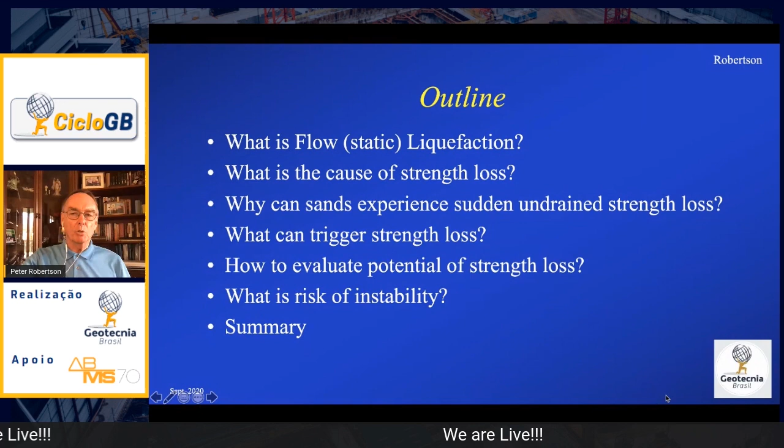So let's start off in terms of what is flow, or as I said, sometimes referred to as static liquefaction. I tend to prefer the term flow liquefaction because sometimes earthquakes can trigger flow liquefaction, and therefore it can be sometimes confusing to think of it only as a static trigger. So hence I'll use the term flow liquefaction. But essentially it's this sudden and significant strength loss resulting in a flow failure.

And there have been several major examples. I'm only going to talk about a few. One of the earliest was actually the Quick Clay landslide in Norway back in the late 1970s. And it's recognized as the Risa landslide. And there are videos on YouTube that you can see what this landslide looked like. Fortunately, it was captured on a home video by several people. And that was in a quick, highly sensitive clay.

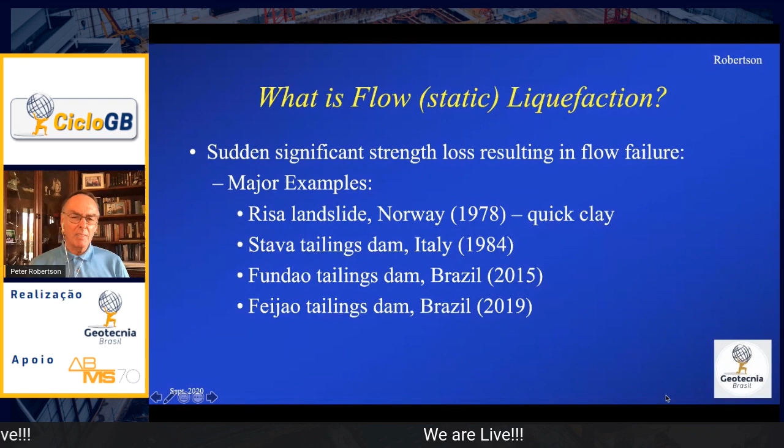But more recently, they've tended to occur in tailings dams, and one of the early major ones was the Stava tailings dam in northern Italy in 1984, and then more recently was the Fundão tailings dam in 2015, and then just last year with the Feijão tailings dam near Brumadinho. And I'll refer to the Feijão tailings dam. I won't mention the investigation. I've given the link to the report, and the details are there.

I just wanted to show some images of the failure just to illustrate how rapid these failures occur. And rather than show the video, I've selected to show some still images from the video. And the time is in the top right-hand corner. So within a few seconds, the failure starts and it bulges, drops at the top, and then rapidly begins to fail and move out very quickly.

And within 10 seconds, the failure has occurred across most of the dam. The initial failure is relatively shallow. And then after the initial failure, when that failed mass moves out very rapidly, there were subsequent relatively shallow failures that retrogressed into the tailings. And within a period of about 5 minutes, most of the tailings were removed from the tailings storage facility.

So if you look at case histories in general, there's been a number of them, and I show an image there of the Stava tailings dam failure in '85, and then the Fundão one below. And the common features are generally the deposits are very young. In terms of geologic age, they're very young. They're all Holocene or younger. And of course, the tailings dams, those are exceptionally young. They're in the order of just a few decades of age, 10 or 20 or maybe 30 years old, which in geologic age, of course, is extremely young.

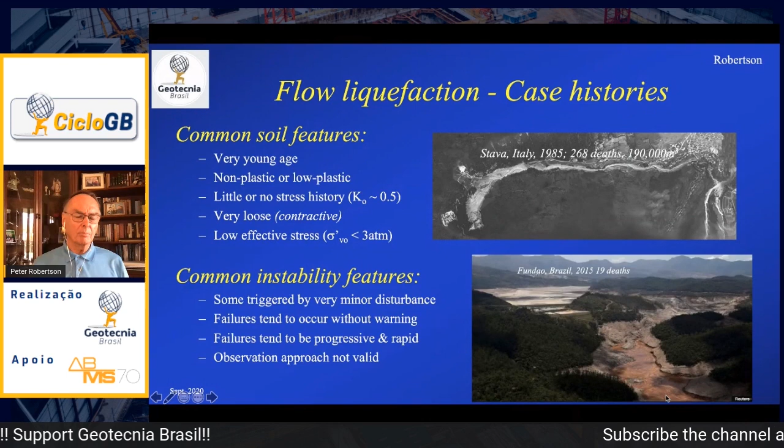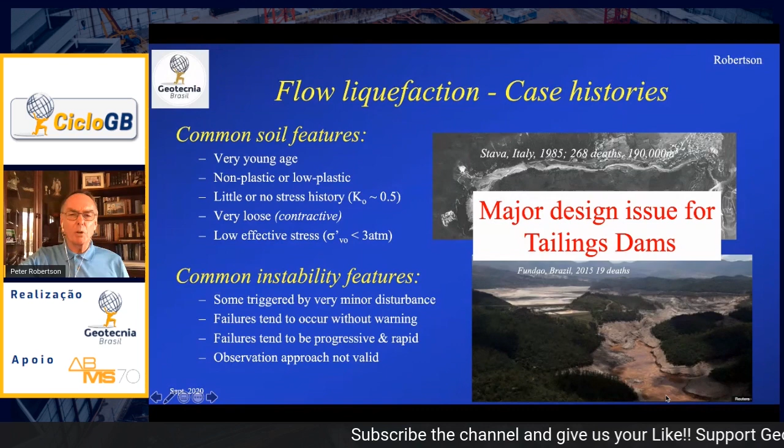Common features of the instability is that some of them are triggered by very minor disturbances. The failures tend to occur without warning, as the still images from that video we showed illustrate. And the failures tend to be progressive and extremely rapid, again, as the Feijão tailings dam failure illustrated. And in tailings dams, often the observation method is used, and the observation method becomes less valid when you're looking at flow liquefaction, because the failures occur so rapidly that there's no time to respond. And so it becomes really a major design issue for tailings dams. And so much of what I'm going to say is really focused on those sorts of structures.

So when we look at the strength loss in undrained shear, most of us are aware that when you shear soils, they tend to move towards a critical state. And the locus of those critical states makes up a critical state line. Here it's illustrated in terms of void ratio against log mean effective stress, and it's illustrated as a simple straight line. And so soils can be either on the loose contractive side, or they can be on the dense dilative side. So if a material is on the loose contractive side, that means if you shear it drained, it will tend to contract down to critical state.

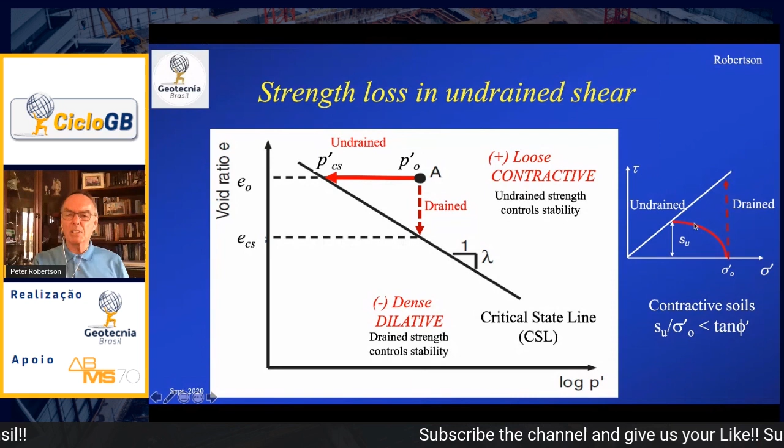But if it's sheared undrained, then that contraction induces a buildup of pore pressure. That buildup in pore pressure decreases the effective stress, and the stress path will move towards critical state at constant void ratio, but decreasing effective stress. And if you look at the strength envelope, soils are essentially frictional in nature, and so the drained strength goes directly up to the strength envelope. But if the stress path moves to the left, with increasing pore pressure and decreasing effective stress, then eventually the undrained strength is significantly smaller than the drained strength.

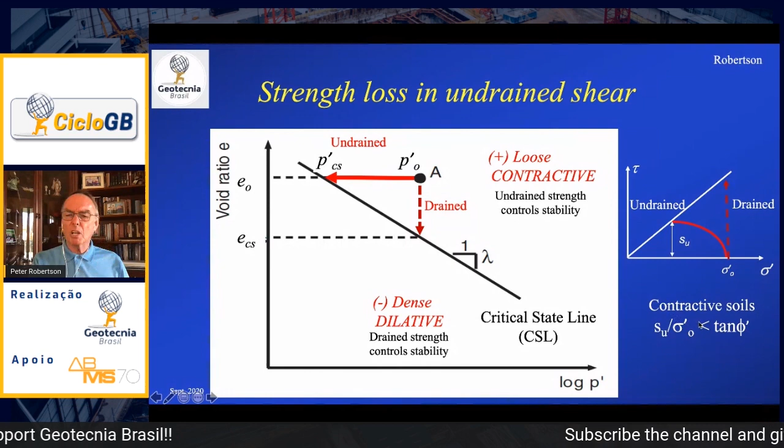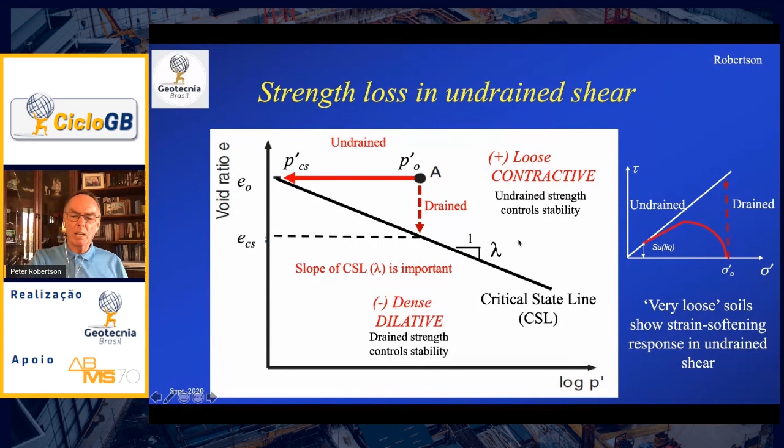And so for contractive soils, the undrained strength ratio is less than the tangent of the friction angle. But also, it depends on the slope of the critical state line. The steeper the critical state line for a given state of contractiveness, you'll get a bigger buildup of pore pressure and a larger decrease in strength. So the undrained strength can actually drop to an extremely low level. And that's often referred to as the liquefied undrained strength or the residual undrained strength. For sandy soils, we tend to use the term liquefied undrained strength, and for clay soils, we tend to use residual. But it's the undrained strength that's mobilized at very large strains. And for some soils, that can be an extremely small number when the critical state line is very steep.

And Been and Jefferies really promoted the idea that we could understand this by defining a state parameter, and it's the distance away from the critical state in terms of void ratio. But actually, a slightly better term would be the stress ratio, which is the ratio of the current mean effective stress to the mean effective stress at critical state. And that's a sort of a direct measure of how much strength loss would occur.

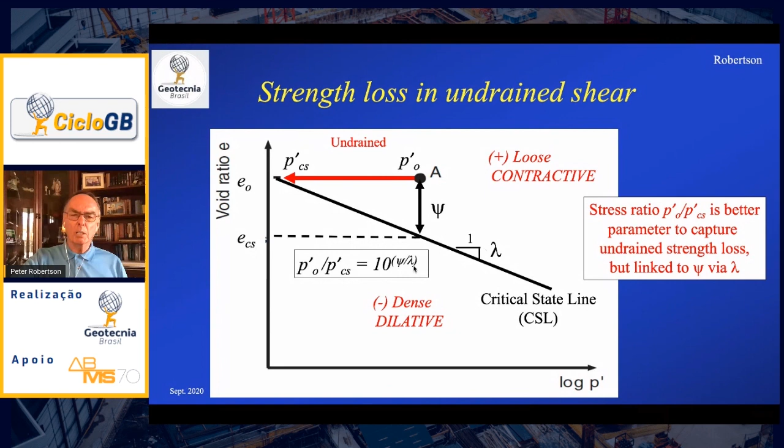And they're linked, so the stress ratio is linked to the state parameter via the slope of the critical state line. And Been and Jefferies described that in detail in their book. Now, if I illustrate the critical state line over a wider stress range, we observe that it is not a simple straight line. It actually curves at higher stresses.

And here I've illustrated two. Toyoura sand is a sub-rounded silica sand, and you can see the curvature occurs at very high stresses. I've chosen to represent the plot in terms of normalized mean effective stress, normalized by atmospheric pressure, so 1 is 100 kPa and 10 would be 1000 kPa. And on the vertical axis, instead of void ratio, I've normalized it as relative density.

That normalizes all the data from various sands. It's not the ideal way to do it, because relative density has uncertainty in terms of how you determine e_min and e_max. But I wanted to illustrate this because Bolton's empirical approach of stress dilatancy was used to estimate the peak friction angle as a function of dilatancy. If you set dilatancy to 0, then you can draw the critical state line using Bolton's empirical relationship. That's what these two dashed lines are, for different levels of the mineralogy parameter Q that Bolton suggested. He suggested a value of 10 for most silica sands and 7 and smaller for more compressible sands.

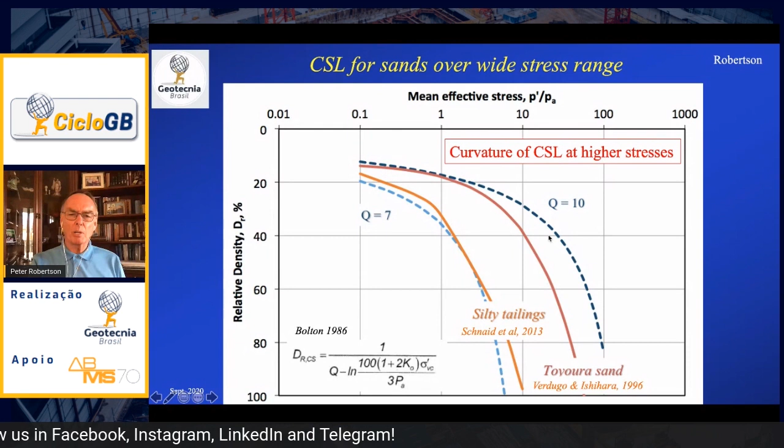You can see here that Bolton's relationship matches very well with the laboratory data, which you would expect because Bolton, of course, based his empirical relationship on extensive laboratory data. So it's not surprising that the two agree. But I show it here as a way of illustrating how much curvature can occur in the critical state line.

Now if I go to an example, in Been and Jefferies' excellent book on liquefaction using a critical state approach, they show data from many different sands, but they show extensive data for Erksak sand, and that's what I've shown here. You can see the critical state line curving. It's quite similar to the one for Toyoura sand. But they tested a large number of samples over a wide range of void ratios and stress levels.

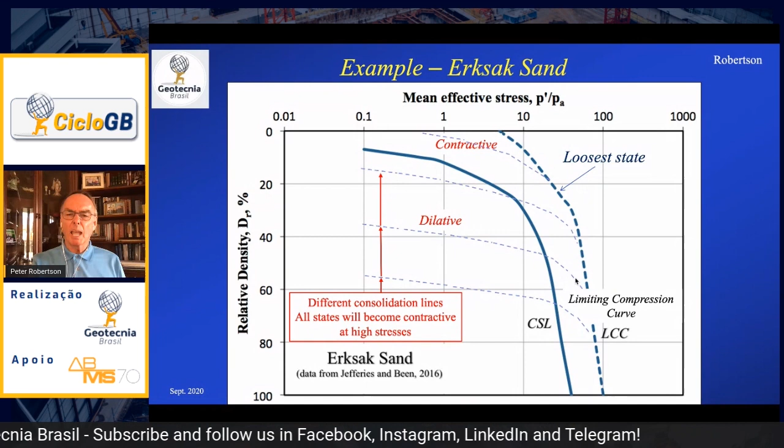And so they were able to also determine the limiting compression curve, which is the loosest state that they could make the sand. I've illustrated in dashed lines a range of consolidation lines: initially extremely loose, consolidating over to its loosest state, and then coming down the limiting compression curve. And then a medium dense sand that would be initially dilative, but eventually crossing over, becoming contractive as the dilatancy is subdued, and then coming down the limiting compression curve. So all sands will eventually become contractive at high enough stresses.

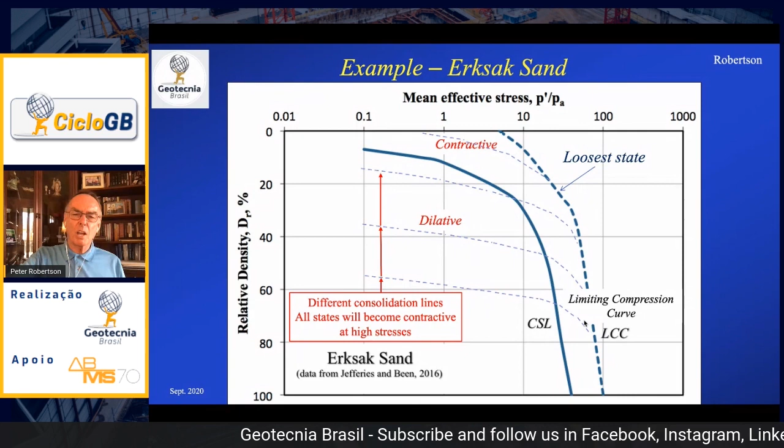But if we look at three samples, I presented a short paper at a conference in Vancouver in 2017 that outlined this in a little more detail. Here I'm illustrating three samples, A, B, and C. They're all at their loosest consolidation state, but at different confining pressures. Sample A is at a relatively low confining pressure at a very loose state, and if it's loaded undrained, there is a significant loss of strength as it moves towards its critical state.

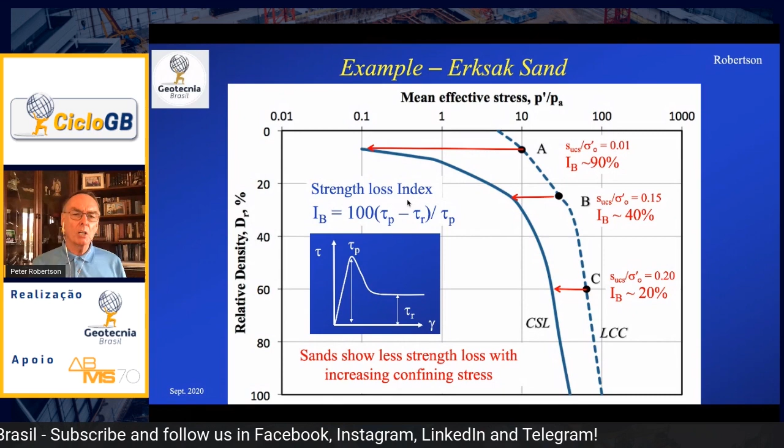In the corner here, I'm illustrating what I'm going to refer to as the strength loss index. It's actually the same as what Bishop defined as the brittleness index. I prefer not to use the word brittleness because brittleness implies not only the amount of strength loss, but how quickly the strength loss occurs in terms of straining. So I prefer to use the term strength loss, and that's what I'm going to use here. But it is the same term that Bishop suggested many years ago, and it is essentially an index of how much strength loss occurs.

If you lose 90% of the strength, then this strength loss index becomes 0.9 or 90%. So sample A loses 90% of its strength. Sample B, which has a denser state in terms of state parameter, will only lose 40% of its strength. And sample C, which is even denser still in terms of state parameter, only loses 20%. So three samples, all at their loosest state, but as the confining stress increases, they show less strength loss.

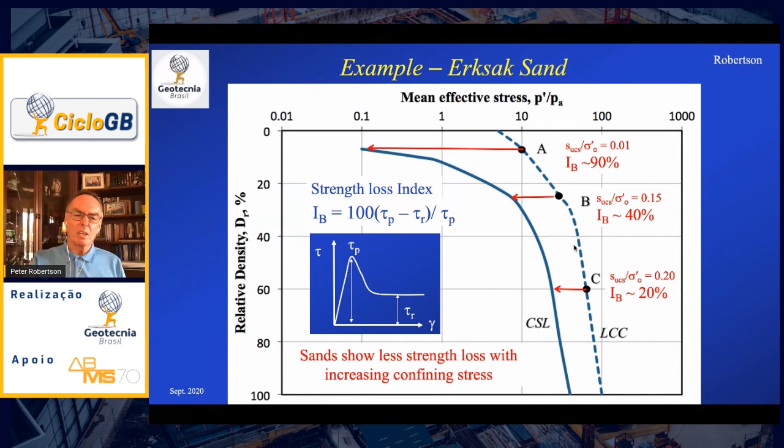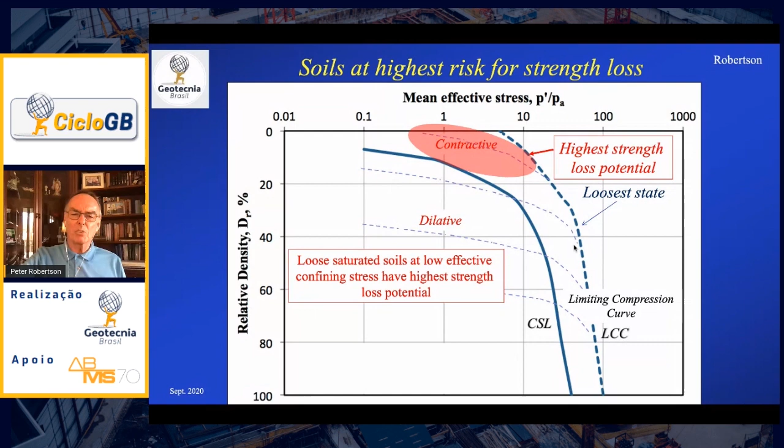So sands show less strength loss with increasing confining pressure. This illustrates that the most dangerous area is very loose, saturated soils at low confining pressure, where there's the potential for very significant strength loss. At higher confining pressure, the strength loss potential decreases somewhat. So we'll keep that in mind and come back to that later.

So what can cause sands to experience this sudden strength loss and behave undrained? Because sometimes these are relatively clean sands and yet they behave undrained. What really happens is if the contractive volume change occurs extremely rapidly, the pore water may not have time to drain, resulting in undrained shear. So it's not controlled by the rate of loading, it's more controlled by the rate of volume change.

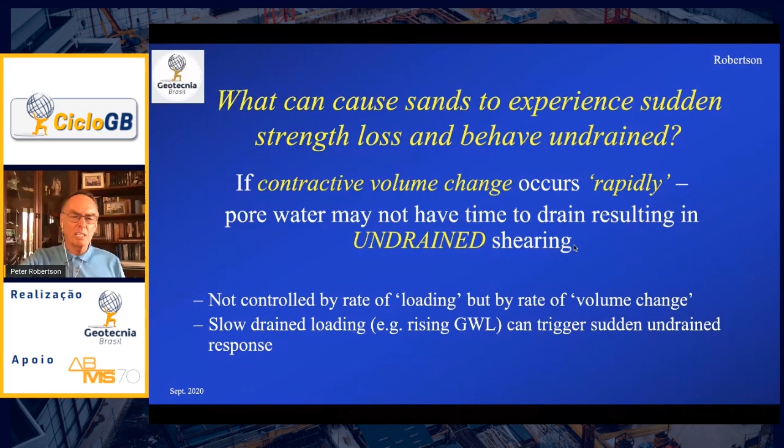Traditionally we tend to think of either slow or quick loading, but it's really the type of loading that induces contraction. And if large volumes of the material can experience this contraction and the water does not have time to fully drain, then suddenly it can switch over to undrained shear and hence show significant strength loss. So slow drained loading, such as a rising groundwater level, can trigger sudden undrained response. It doesn't necessarily require undrained loading to trigger the undrained response. You can have slow drained loading trigger this. And we published a paper a little over 20 years ago doing laboratory testing to illustrate that, when I was at the University of Alberta.

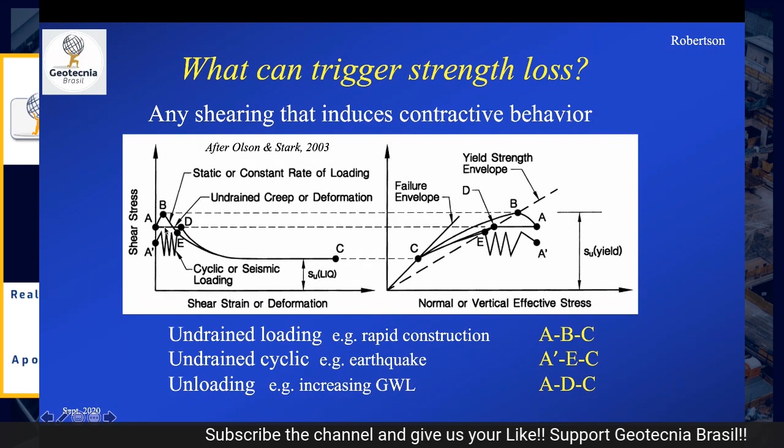And so what can trigger the strength loss? Here I've taken a very nice diagram from Olson and Stark in 2003. It basically says any shearing that induces contractive behavior could trigger this strength loss. Olson and Stark showed 3 stress paths. On the left, it's got the stress strain curve, with a peak and then dropping to a liquefied undrained strength. And on the right is the stress path. They refer to a yield strength envelope and then eventually to the failure envelope.

If you start off at point A, then traditional undrained loading like rapid construction would follow a stress path that would go A, B, and C. So it would rise up to its peak undrained strength and then strain soften down to its liquefied undrained strength. Or of course, if you had an earthquake, it could start off, here referred to as A prime, and the cyclic loading from the earthquake would move it across, and then undrained strain softening would occur, and it would drop down to its liquefied undrained strength.

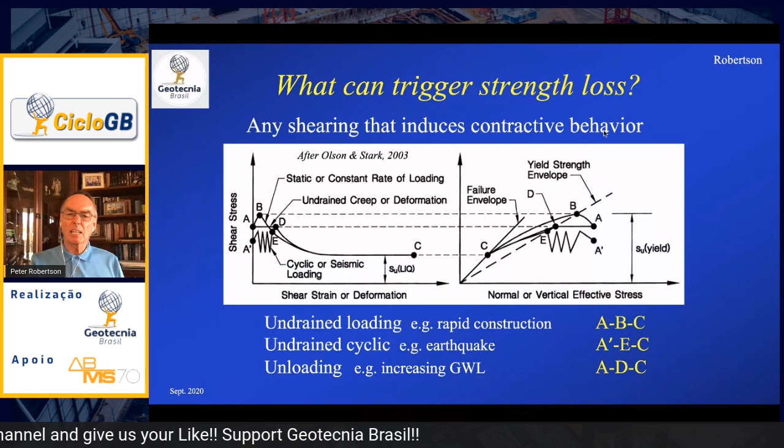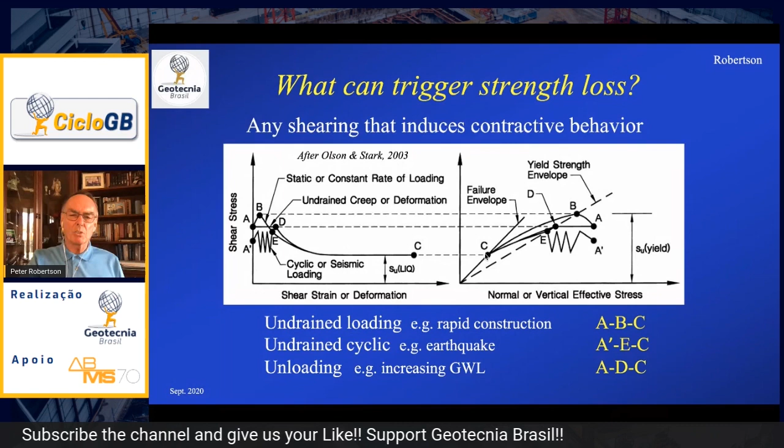But you can also have slow unloading, such as the stress path A to D, such as an increase in groundwater level. If you have a slope with a piezometric surface within the slope, and that piezometric surface can increase, then the shear stresses stay essentially constant, but the mean effective stress decreases, and so the stress path will move slowly to the left, and it can do so in a drained manner until eventually it hits the yield surface, and then suddenly undrained collapse can occur, and it moves to the liquefied undrained strength. So there can be many different triggers that can trigger this undrained strength loss.

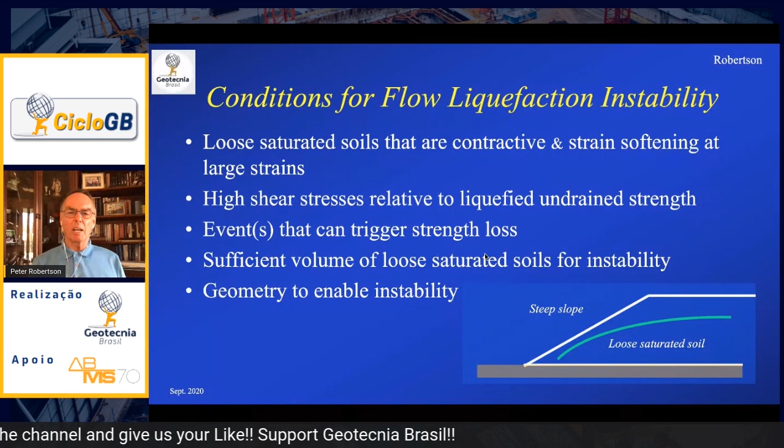So what conditions are required for instability to occur due to flow liquefaction? Essentially, you must have loose, saturated, or at least near saturated soils that are contractive and strain softening at large strains. The shear stresses in the slope must be relatively large relative to the liquefied undrained strength. They must be larger. Then you must have some event that could trigger the strength loss. You must have a sufficient volume of the loose saturated soils for instability to manifest. And then, of course, you must have a geometry that enables instability to actually occur.

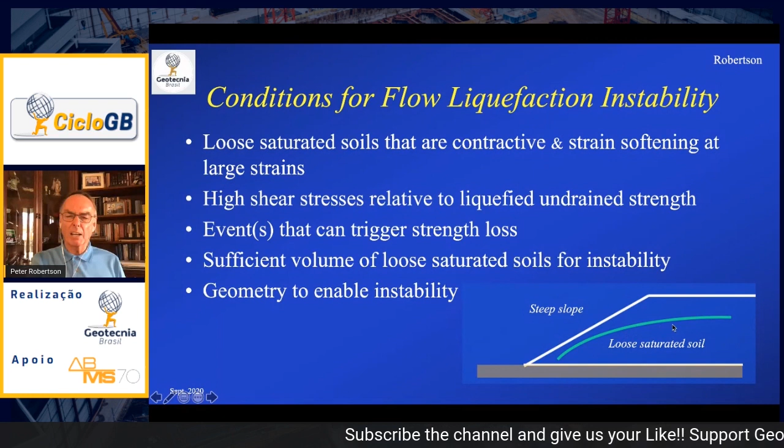And of course, that's why tailings dams tend to be susceptible to this. They often have relatively steep slopes. They sometimes have a relatively high phreatic surface in the tailings dam. And if you've got loose saturated tailings, where the liquefied undrained strength could be less than the static driving stress, then you have all of the components there.

So then the next question is, how do we evaluate susceptibility? Since they tend to occur in very loose soils that are either non or low plastic, these are soils that are also extremely difficult to sample in a truly undisturbed manner.

So in situ testing is often preferred, at least in the initial stages, combined with some laboratory testing. And certainly the cone penetration test with pore pressure measurements, the CPTU or the seismic CPTU, is preferred because it's rapid, it's cost effective, it provides a continuous profile, it's highly repeatable, and we also have extensive experience with case histories. And from the CPT, we can estimate whether or not soils are contractive at large strains.

We can measure the in situ pore pressure, so we can determine what the piezometric profile is like, which is what we need to calculate the effective overburden pressure. We can do that through dissipation tests, and the rate at which the pore pressure dissipates tells us also a lot about the drainage conditions of the material and whether or not the CPT itself was being carried out under undrained or fully drained conditions.

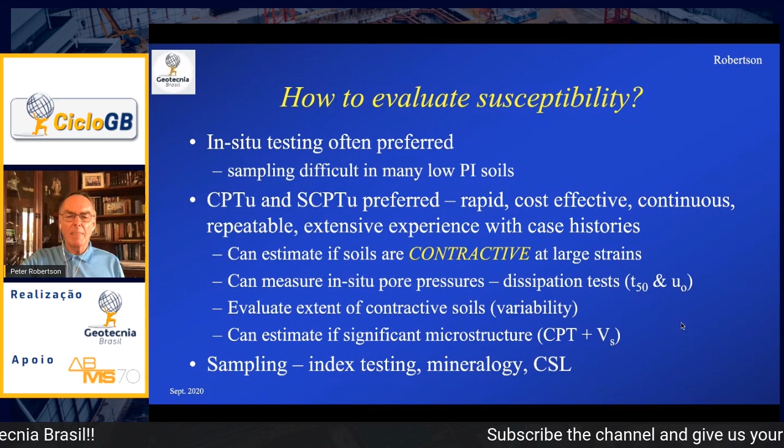And then, of course, ideally you need some sampling to do index testing, so you can determine the grain size characteristics and the plasticity of the material. Also look at the mineralogy. Ideally do some X-ray diffraction so you can look at the mineralogy in more detail, and then take disturbed samples and make reconstituted samples to determine the critical state line.

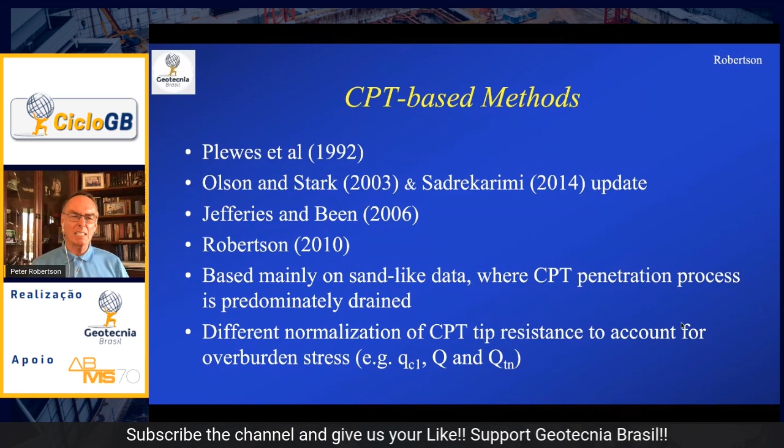So there's a number of CPT-based methods. Probably one of the first was by Howard Plewes and his colleagues, Jefferies and Mike Davies, and that was in 1992. And that was built around the state parameter approach using the CPT. And then Olson and Stark developed a method, and Sadrekarimi has published a few updates on that method. And then, of course, Jefferies and Been have given their updates, and in their book that was updated in 2016, give extensive detail of their methodology. And then in 2010, I published a method as well.

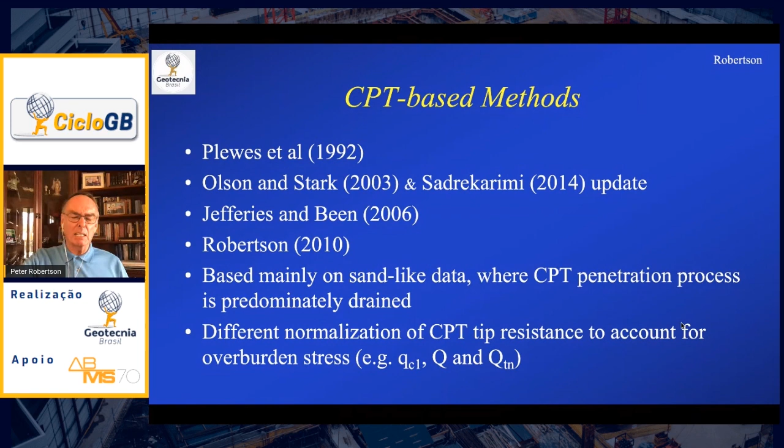And so most of them are based mainly on sand-like data, where the CPT penetration process is predominantly drained. And each of the methods uses slightly different normalization techniques to normalize the CPT tip resistance to account for effective overburden pressure. And most of the methods, Plewes, Jefferies, and myself, we all used a normalization that also was dimensionless. The one criticism a little bit with the Olson and Stark approach is that they didn't make it dimensionless, so it's actually in megapascals, so you have to be aware that it's not fully dimensionless.

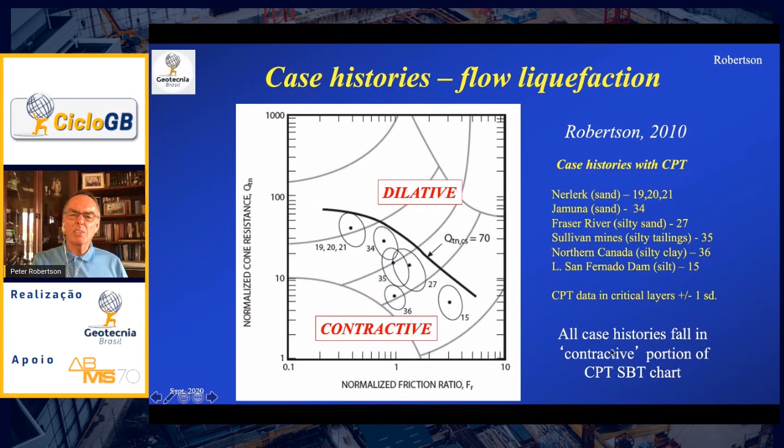Now, given the time constraints, I'll just, of course, reference my own approach and give you the outline of that. And so in 2010, I looked at a number of case histories and narrowed them down to about 6 that had sort of modern electric CPT data, and here they're listed on the right-hand side. And I was able to plot essentially most of the CPT data, not just in terms of the mean value, but essentially the mean plus or minus the standard deviation. So it shows as a sort of an oval on the soil behavior type plot of normalized cone resistance against normalized friction ratio. And you see the 6 case histories.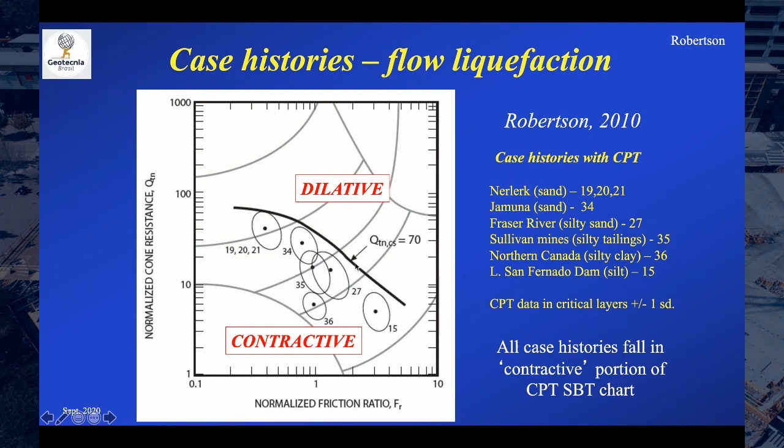And Plewes and Been and Jefferies had suggested a boundary for state parameter, and I had said that that boundary could be represented by a clean sand equivalent of 70, and all of those case histories plot below that, which is consistent with the Plewes boundary, consistent with the Been and Jefferies boundary, and of course consistent with the one I had suggested. And following on from that, I then linked it to the liquefied undrained strength and said that for sandy soils, you could actually estimate the liquefied undrained strength ratio from this normalized clean sand equivalent. And you can see that all of the case histories have liquefied undrained strengths averaging about 0.1 and all less than 0.15. So the undrained strength ratios are relatively low.

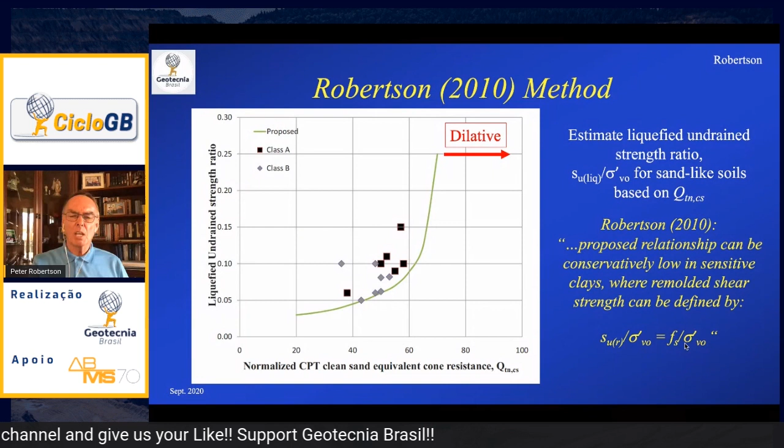But in that paper, right near the end, I did comment that the proposed relationship can be conservatively low in sensitive clays, where the remolded shear strength can be defined by the sleeve friction, or the remolded undrained shear strength ratio is the sleeve friction from the cone divided by the vertical effective stress. That was recognizing that these relationships were primarily for sandy soils, where the penetration process is essentially drained. But when you get into clay soils and the CPT penetration process is undrained, then we can switch over to the more traditional ways of estimating the remolded undrained strength of clays.

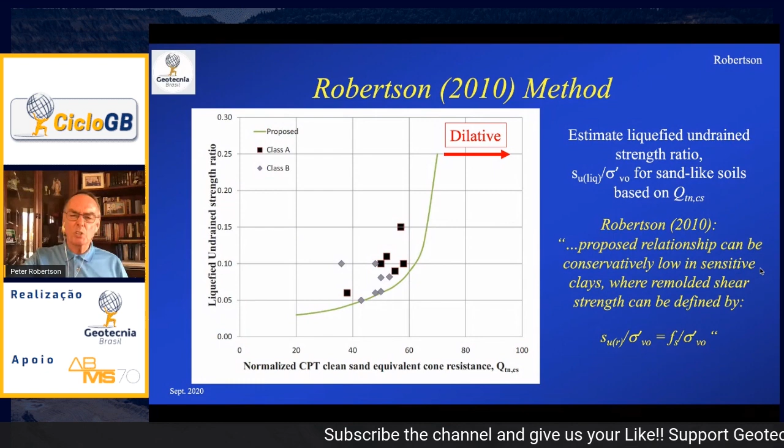But I've noticed in practice that most people have not really followed that final note. To be fair, it was only a small note near the end of the paper, and I didn't define exactly the limits of when you should start to switch over to this alternative relationship. And so recently, I've decided to update the relationship to help users understand when to switch over.

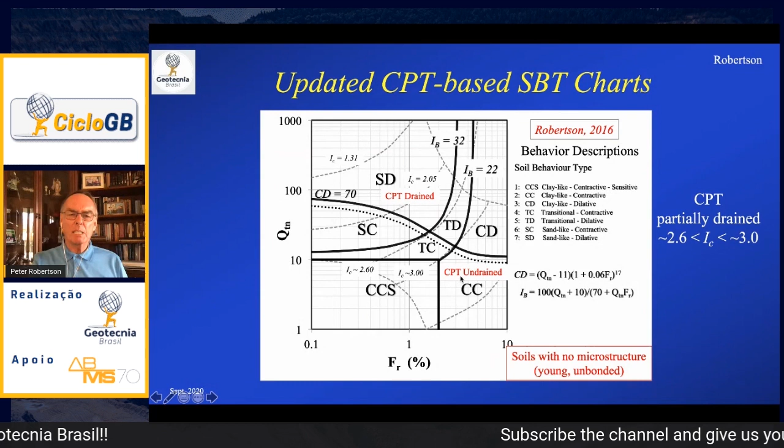In 2016, I updated the soil behavior type chart to be more generic. I put in this boundary line that would define dilative materials above it from contractive materials below, and I gave it a little bit more curvature going into the clay region. Here in red, I've identified that the sand-like materials, which are sand-like dilative and sand-like contractive, are predominantly drained during the CPT penetration process. And when you get into the clay-like region, the CPT is essentially undrained during the penetration process.

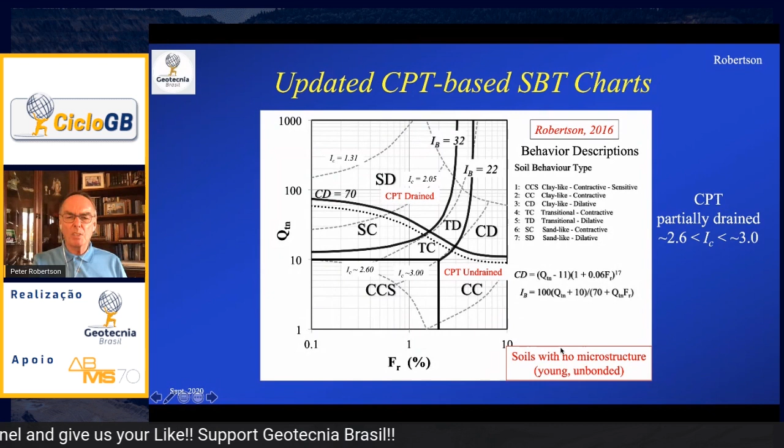Then I identified this transition material where the CPT penetration process was partially drained. Here I've highlighted it, roughly from an IC of about 2.6 to about 3. So in that middle region, you can get partial drainage. Also keep in mind, this chart is for soils with little or no microstructure, so young, unbonded materials.

To calculate that clean sand equivalent, Catherine Wride and I, back in 1998, for cyclic resistance, for cyclic liquefaction, suggested that you could calculate the clean sand equivalent by taking the normalized cone resistance and multiplying it by a correction factor, which in the early days was often referred to as a fines content correction. I think more increasingly people recognize that it's really a correction factor to account for compressibility of the soil.

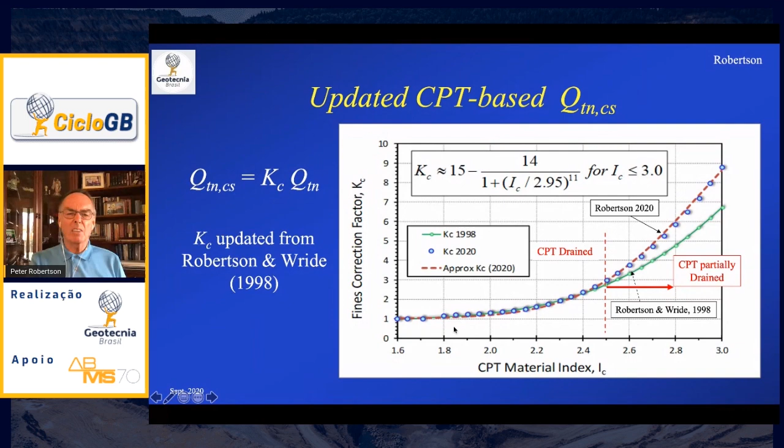We had suggested that this correction factor was a function of IC, and essentially there was no correction in clean sands where IC is less than about 1.6. But as IC increases, as you move towards the silty sand region, then you'd need to make a correction. But I've recognized now that once you get to around 2.5 or 2.6, there is the risk of partial drainage during the CPT. And so the original correction factors don't directly work as well, and they don't link so well to when you get to fully undrained behavior with the CPT when IC is greater than 3. So I'm suggesting an update.

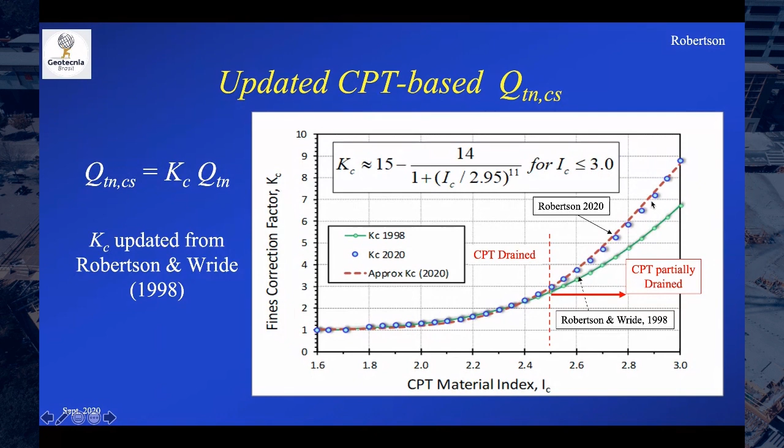You can see it makes no difference at values less than 2.5 and very little difference less than 2.6. So it makes very little difference to the evaluation of cyclic liquefaction, which generally stops at a value of 2.6. But it makes a bigger difference once you extend it into the clay-like region.

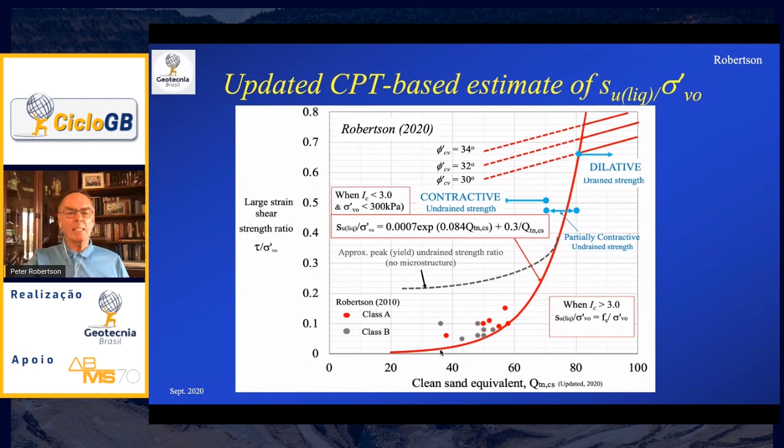Now, if I take all of that together, you can actually plot contours of the liquefied undrained strength ratio onto the soil behavior type chart. And I find this a useful exercise, because often people will plot CPT data onto the chart. And so if you've got an overlay of these contours, you can immediately get a sense of what the liquefied undrained strength ratio would be.

And so it's a small difference from the original clean sand equivalent curves, where they just curve down a little bit more, and then they tie into the straight line relationships in the clay-like region, which is controlled by the sleeve friction. So these straight line portions here are where the liquefied undrained strength ratio is just simply equal to the sleeve friction divided by the vertical effective stress. So that's what they look like.

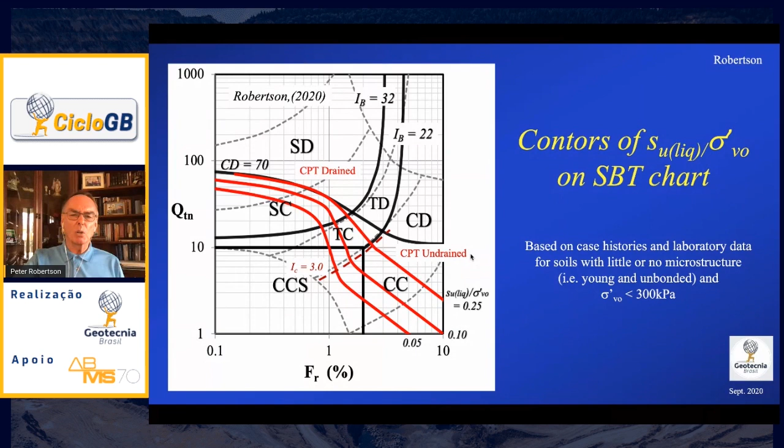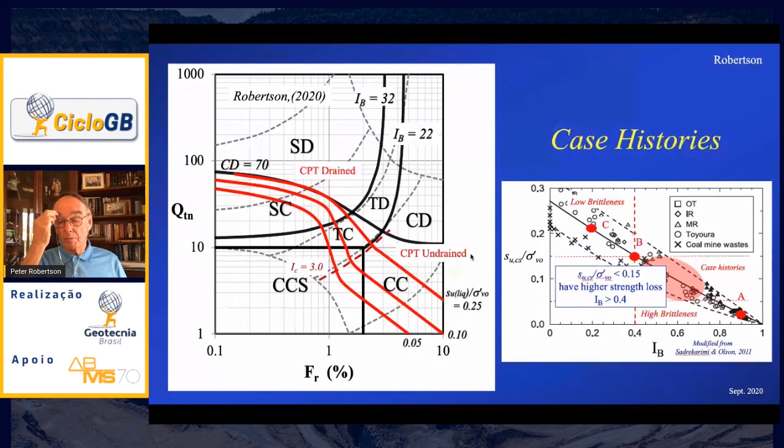And they're based primarily on case histories and lab data of soils with little or no microstructure and at relatively low confining pressure. Now, when you look at the case histories, I commented earlier that all of the case histories had back calculated liquefied undrained strength ratios of 0.15 or less, with most around 0.1. Now, if you look at the data here, it's data modified from Sadrekarimi and Olson of the critical state undrained strength ratio as a function of the strength loss index. And when you put the case histories in there, you see that the case histories must all have had strength loss greater than about 40%. So a significant amount of strength loss was occurring.

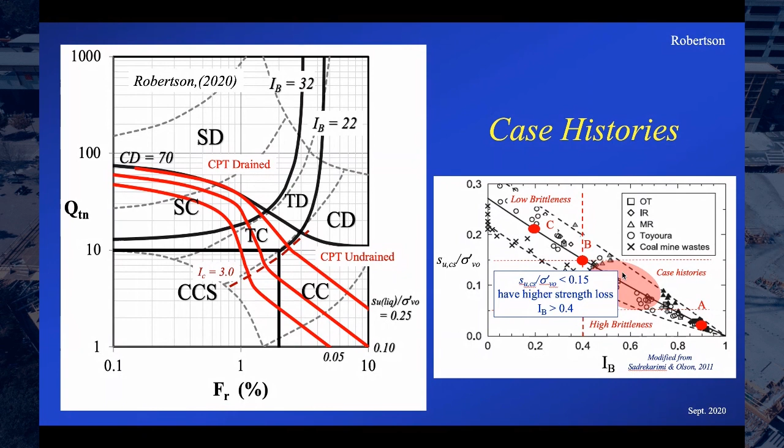Now, if I draw the contour of that 0.15 undrained strength ratio, and I've shaded it in here, it says in this region is where you would expect the greatest amount of strength loss. So anything that plots within that shaded area, there'll be significant strength loss. Now, there is a region over here where clay-like materials can be contractive at large strains, but not necessarily strain softening, or with very little strength loss occurring. So there is a contractive region with very little strength loss compared to the sensitive clay region where there's significant strength loss. So I find this a very useful way to look at CPT data with these contours.

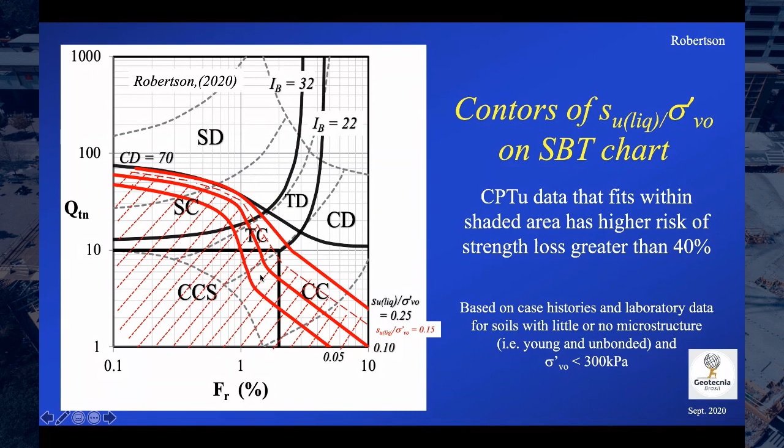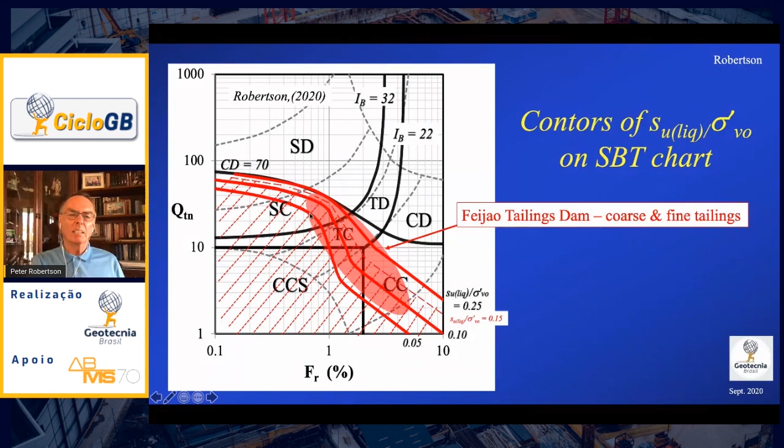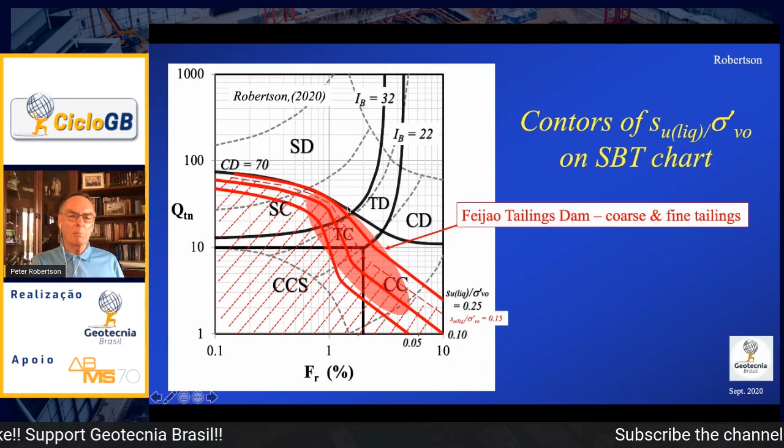And if you look at the case histories, here's the Fundão data, predominantly for the coarse tailings, and it plots with most of the data in that large strength loss region. And here's the data from Feijão tailings dam, both the coarse tailings, which tended to plot higher up here in the sand-like region, and then the fine tailings that plotted in the clay-like region where the CPT process was undrained. So for the coarse tailings, the CPT penetration was drained, and for the fine tailings, the CPT process was undrained.

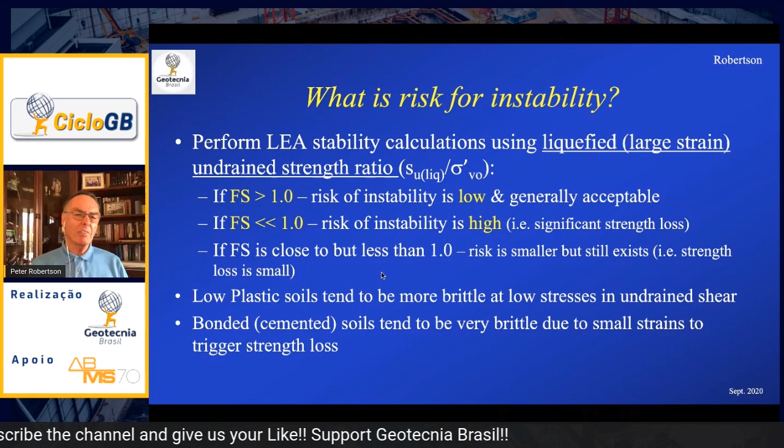So let's talk a little bit about the risk of instability. And ideally, the way to evaluate that is you can perform limit equilibrium analysis using the liquefied large strain undrained strength ratio. And if the factor of safety is greater than 1, then clearly the risk of instability is extremely low and generally acceptable. If the factor of safety using the liquefied undrained strength is significantly less than 1, then there's a risk of instability and the risk is high.

In other words, there could be significant strength loss, and the risk of instability is very high. Now, if the factor of safety is close to 1, but slightly less, then the risk is smaller, but still exists. And what that means is that if instability were to occur, the inertia forces would be much smaller because the factor of safety is quite close to 1. Compared to when the factor of safety is significantly less than 1, then there are large inertia forces. And once instability manifests, then the thing can rapidly get out of control and move quickly.

The other observation is that low plastic soils tend to be more brittle at low strain, at low stresses in undrained shear, and that bonded soils also tend to be very brittle due to the small strains to trigger strength loss. And I'll illustrate that shortly.

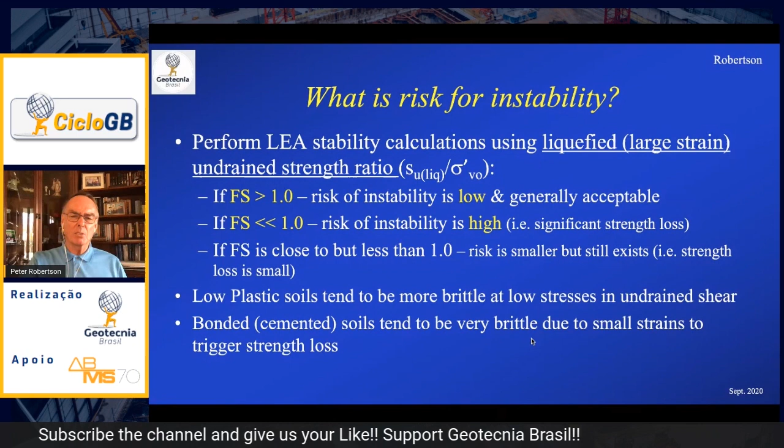So when we look at the risk, here I've tried to illustrate in some simple diagrams. So I've illustrated a slope here, a relatively steep slope that's got a high phreatic surface, and we're looking at an element of soil. And I show both the stress strain curve as well as the stress path in terms of shear stress against mean normal stress with the failure envelope. And because the slope is relatively steep, the initial shear stresses in the slope are high.

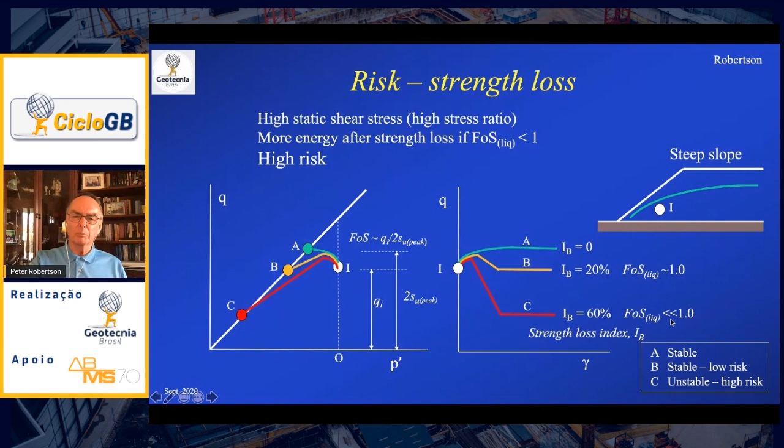And so I've illustrated 3 stress strain curves, one where there is no strength loss in undrained shear, so the strength loss index is 0, another one where there's only 20% strength loss, and another one where there's 60% strength loss. And you can see just by comparing the initial static shear with the liquefied undrained strength that the factor of safety, if there's no strength loss, is greater than 1, because you would use the peak undrained strength. But for 20% strength loss, the factor of safety ends up, for this particular example, being very close to 1. But if there's 60% strength loss, the factor of safety is significantly less than 1. And so there's a high risk of instability if the strength loss is triggered.

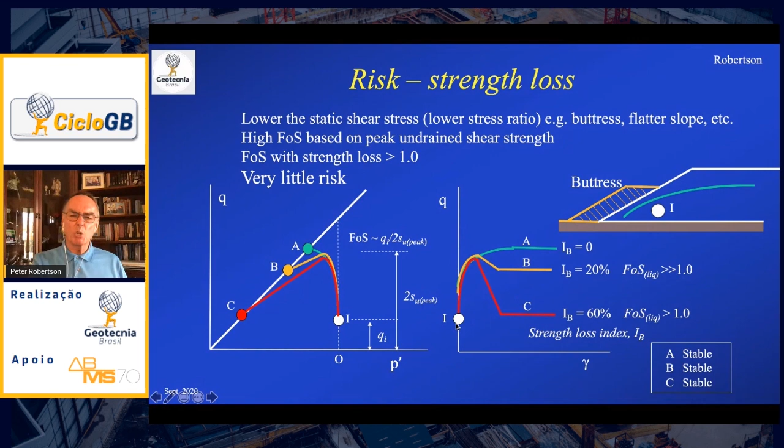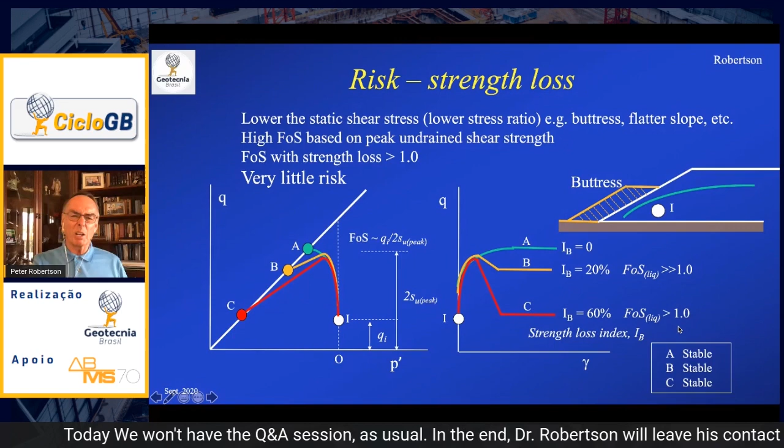And then, of course, if you make the slope even flatter, or you were to construct a buttress at the toe of the slope so that the shear stresses are reduced even further, now even the material that has 60% strength loss potential, the factor of safety is greater than 1, and all of the scenarios become stable, and so there's very little risk involved.

Now, if we bring in the element of how brittle the material is, you can have two materials that have the same strength loss index. Here I'm illustrating a 60% potential strength loss, but one where the strength loss occurs quite rapidly. This is the one in red. So you would regard this as being brittle, where the strength loss occurs at very small strains. But the other one shown in green is where the strength loss occurs more slowly and over a larger strain range. And so this would be considered more ductile.

So they both have the same amount of strength loss index, or Bishop's brittleness index. So they both show a strength loss index of 60%, but clearly the material that is more ductile would be less of a risk than the material that's more brittle. And generally, low plastic materials tend to be more brittle, and high plastic materials tend to be more ductile.

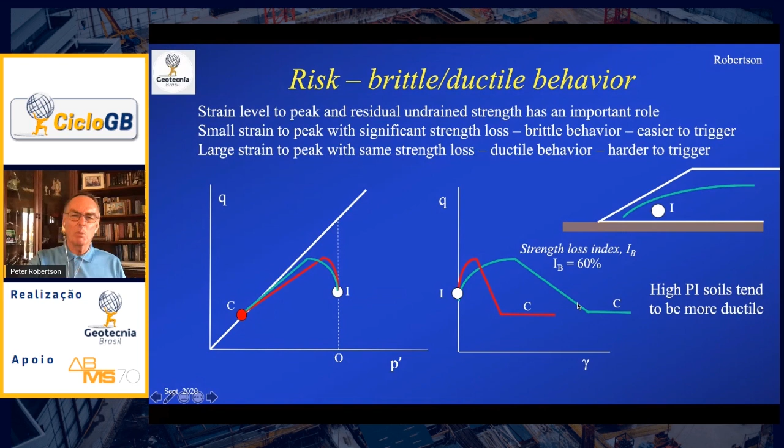Now, if we introduce bonding or cementation, what tends to happen is light bonding can increase the peak strength. So here, if you look at the stress path, the stress path can actually exceed the critical state friction angle due to the bonding. And then once the bonding is broken, it then becomes extremely brittle and shows a higher strength loss index. So although they both have similar liquefied undrained strengths, the lightly bonded material is actually more brittle and shows a higher strength loss potential than the other material.

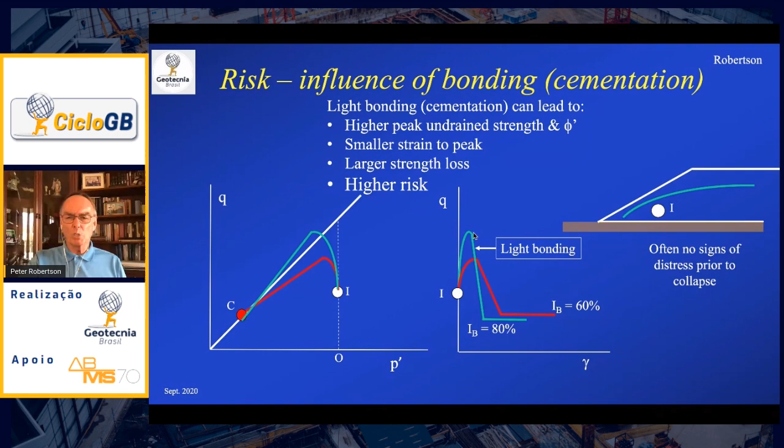And so you can often have no signs of distress prior to collapse because the material is lightly bonded, so it's not deforming very much. The strains are very small, but then once the bonding is exceeded in certain areas, then it can very quickly fail and rapidly develop into a failure mechanism with almost no signs of prior distress.

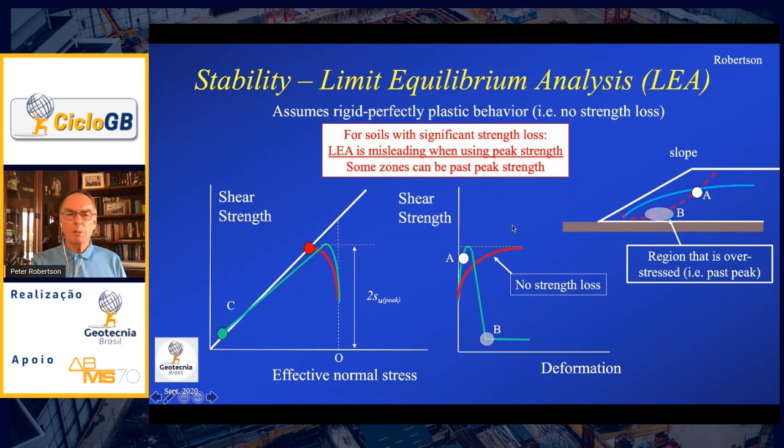Now, if you look at using limit equilibrium analysis, one of the problems if you use the peak undrained strength is that the results can often be quite misleading if the material has the potential for strength loss. Limit equilibrium analysis assumes a rigid, perfectly plastic material. So it assumes basically a single value of strength independent of straining.

So if you have a traditional material that in undrained loading shows no strength loss at all, so it rises up to its peak strength, then limit equilibrium can provide a reliable estimate of the factor of safety. But if you have a material that is potentially strain softening with a significant strength loss, as I illustrate with the green example here, then you may have some elements of the soil that are before peak, but other elements that have already exceeded their yield and have already dropped down to their liquefied undrained strength.

So the average factor of safety may be misleading, in that some areas are already overstressed and have already passed their peak strength. So limit equilibrium using peak undrained strength ratio, when you have a material that is susceptible to significant strength loss, can be misleading and should be used with caution.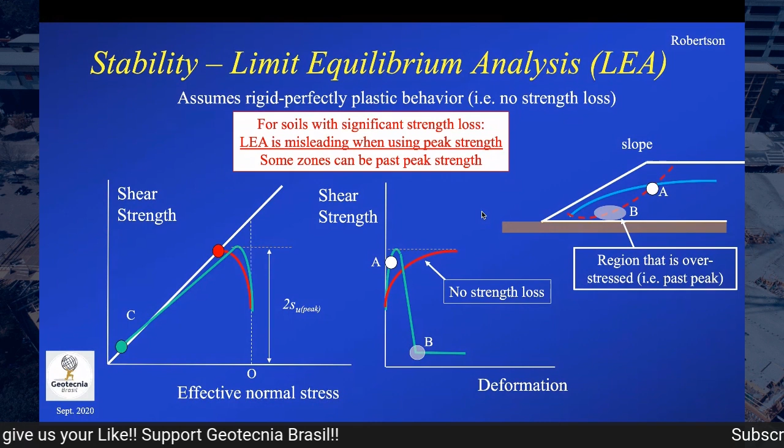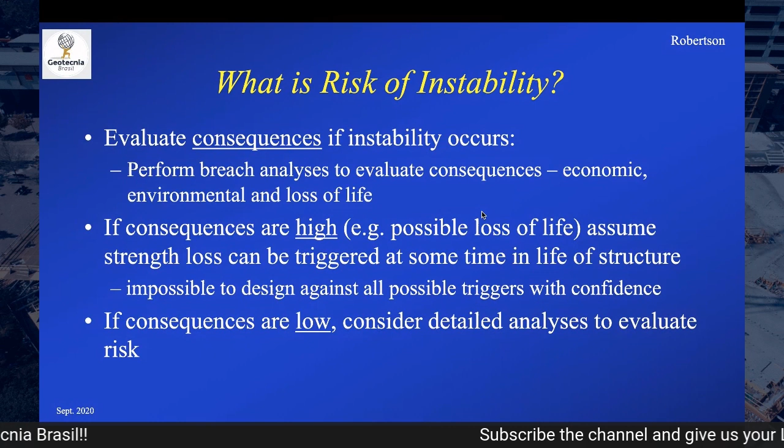So what's the risk of instability? When you're dealing with large structures, you have to evaluate the consequence if instability occurs. Nowadays, for many tailings dams, you perform a breach analysis where you assume that if failure were to occur, you evaluate what the consequences are, in terms of economic, environmental, and loss of life. And if the consequences are high, for example, significant loss of life, then you assume that strength loss can be triggered at some time in the life of the structure.

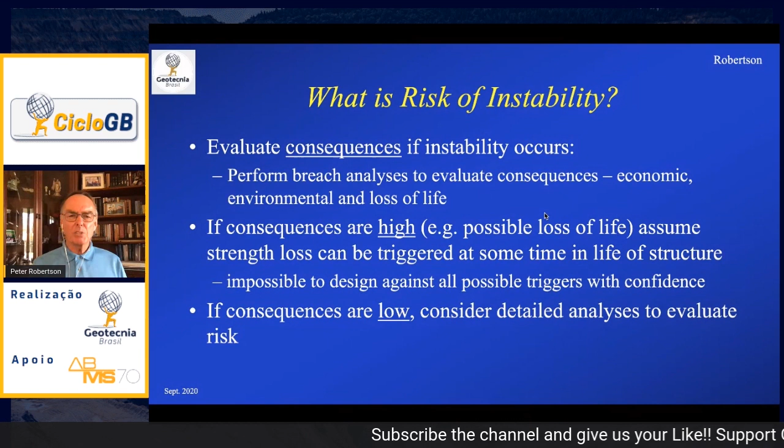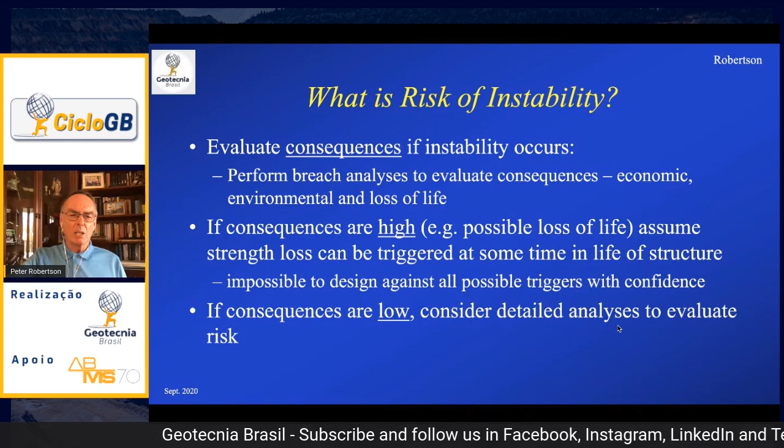It's impossible to design against all possible triggers with any level of confidence. So if the consequences are high, the only thing you can do with confidence is to assume that a strength loss will be triggered at some time in the future and design accordingly. If the consequences are low, in other words, no loss of life, little economic damage, etc., then it is possible that you could consider a detailed analysis to evaluate the risk of instability and whether or not it could be triggered. We don't have time to discuss that in detail, but the message here is that if the consequences are high, you must assume that strength loss will be triggered at some time in the life of the structure.

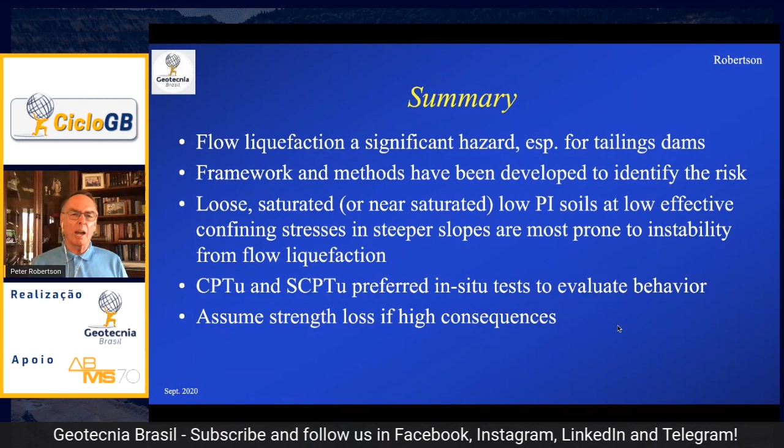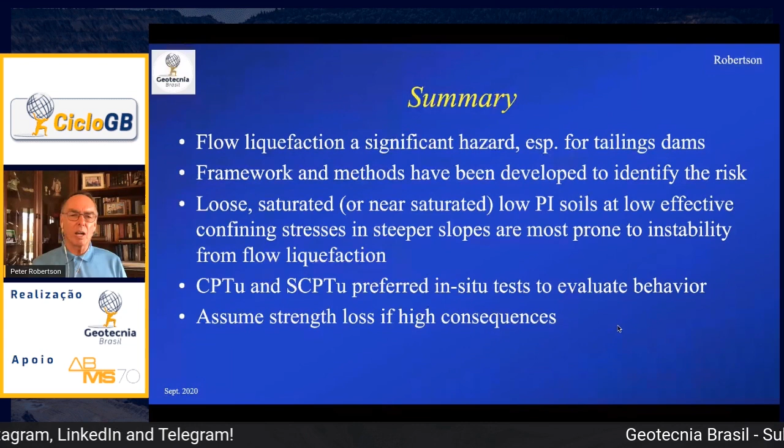So I've covered a lot of ground there. To summarize, flow liquefaction is a significant hazard, especially for tailings dams. I've outlined a framework and methods that have been developed, and Been and Jefferies' book is devoted to going over a framework and methodology in great detail, and I recommend you read it. What we know is that loose, saturated or near saturated low plastic soils at relatively low effective confining pressure in relatively steep slopes are the most prone to instability from flow liquefaction.

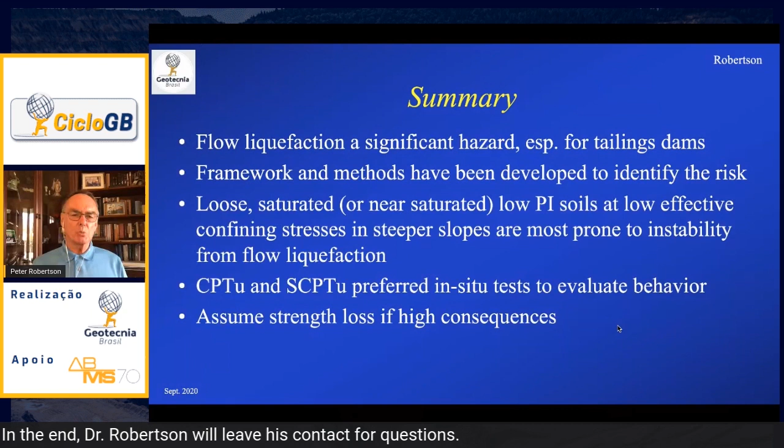And that in situ tests like the CPT with pore pressure or the seismic CPT tend to be the preferred in situ test to evaluate this behavior, in combination with selective sampling and appropriate lab testing. And that you should assume strength loss if the consequences of instability are high.

I know I covered quite a lot of ground there, but it will be recorded, and so you do have the opportunity to go back and relook at some of the slides and study them in a little bit more detail. I do apologize if we moved rather quickly, but hopefully with the recording, you'll have time to look at it at your own speed.